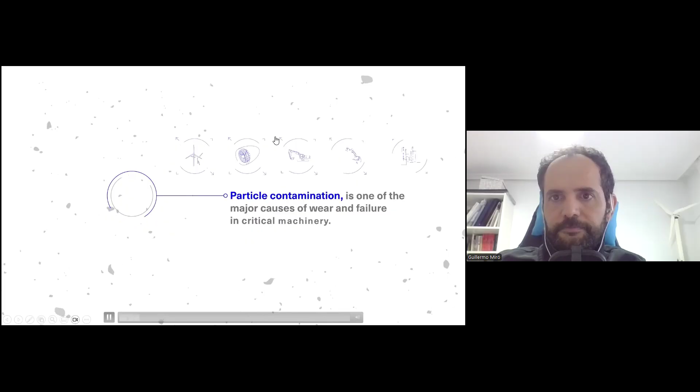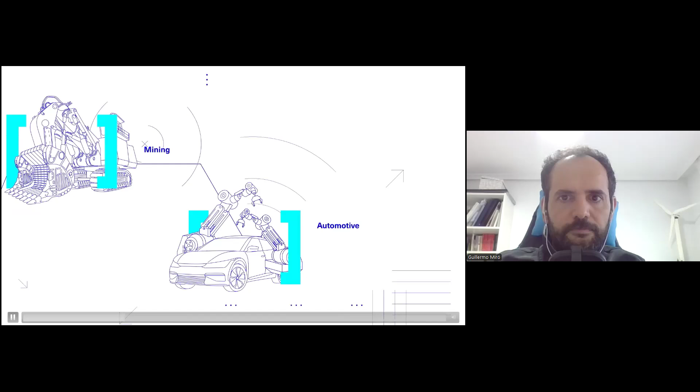Particle contamination in oil lubrication systems is one of the major causes of wear and failures in critical machinery. For over 10 years, Atten has been providing technical support to the industrial sector, enabling them to make precise decisions thanks to their advanced and patented optical technology. By expanding the information on asset health and lubricant quality, problems can be detected or avoided early.

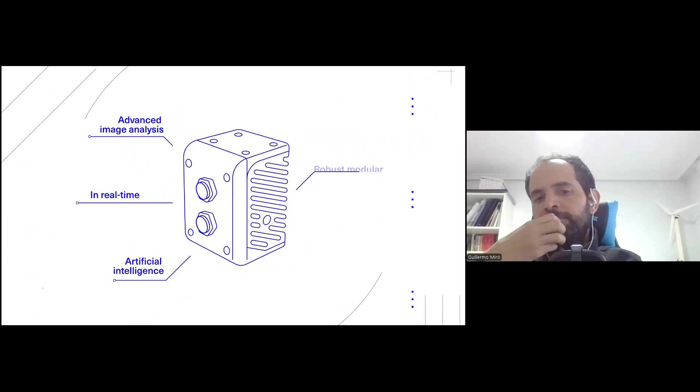As a pioneer in their industry, Atten launched their first sensor on the market over 10 years ago and has since developed 7 solutions with 36 associated patents. Their unique technology applies advanced image analysis and artificial intelligence techniques, allowing them to count particles and provide standardized information, ISO 4406, with exclusive features such as bubble discrimination, particle shape analysis, and fluid degradation.

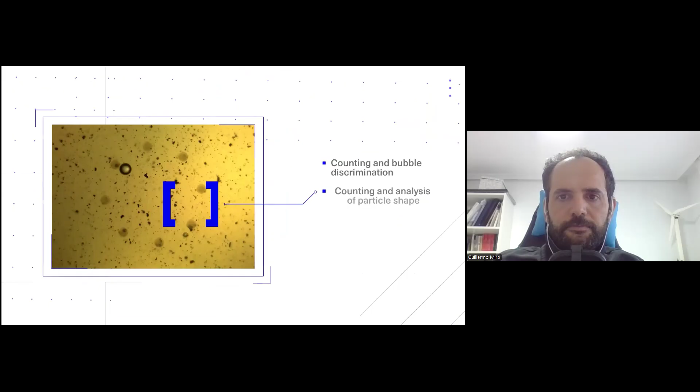With thousands of sensors installed in over 20 countries, Atten has adapted its team of engineers to provide the best possible support according to each customer's needs. If you want to take control of your assets, contact the Atten team.

Okay, so basically what we did is we develop technologies focused on monitoring these 4 main aspects. One is lubricant condition, where we measure oil condition using our own parameter. Then we have a viscometer that can be integrated. Then we have particle counting or contamination monitoring using ISO 4406 standard or NAS 1638 standard.

We are able to, inside of this contamination, measure the morphology and the shape of the particles to detect additional information about the wear processes that are occurring in the machine, adding a new layer of information, a new output of information from the monitoring. And then we are able to measure also water presence, using a near infrared sensor and providing ppm level results.

So, sorry, the first device, it's OilWear. We saw the video before, but let's do it again.

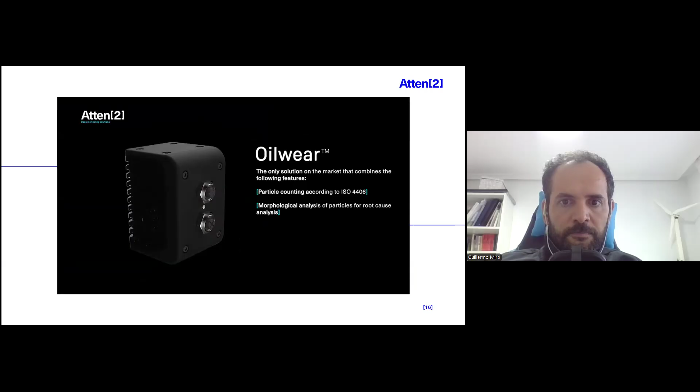This is one of the products that is inside of the SMK, and this is called OilWear. OilWear is a contamination monitor and sensor that detects particles and bubbles larger than 4 microns, and it's designed to work online with no human intervention, and it provides real-time information on the asset condition.

So how it works is it's an inline microscope. It has illumination on one side, optics and camera on the other side, and the oil is flowing in the middle. So based on that, we take relevant pictures of the fluid, and we quantify the particles per sizes, getting cleanliness codes, bubble counts. We are able to distinguish between bubbles and particles, and we are able to distinguish morphologies for particles above a certain limit. And then we provide also oil condition and images.

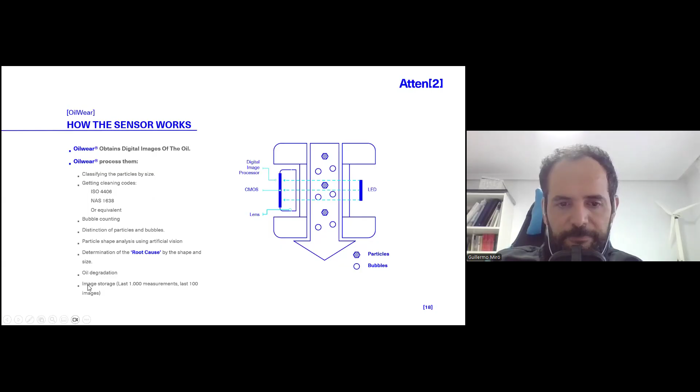Okay, this is a summary of what we do. So basically we provide ISO contamination. This can be also NAS, in case your scenario is NAS based. Then we provide bubble discrimination. So the sensor is automatically discriminating between particles and bubbles, thus providing a result within a wider range of operations, because when there are bubbles, counting particles becomes more difficult, but we are able to overcome that.

Then we provide root cause analysis as said, and then we provide oil condition parameter based on the visual aspect of the lubricant. And then we also provide images. This is the fifth part. So we provide all of this information.

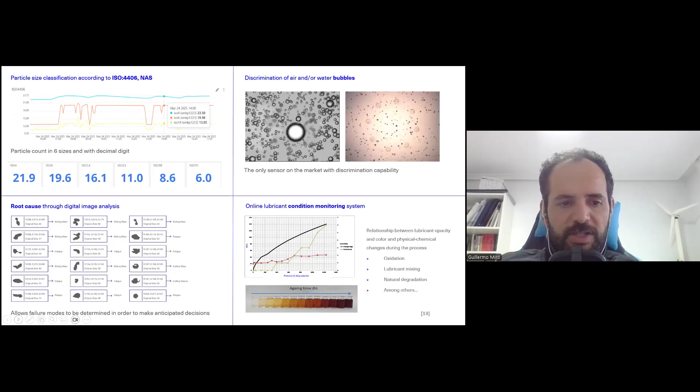Then the other device that is included in this SMK that we are presenting today is the OilHealth.

Do you change the oil in your equipment too frequently? Or are you delaying the change and putting the performance of the equipment and safety at risk? Atten2's Oil Health Solutions help you make optimal decisions, preventing wasted resources and costly breakdowns. Our optical spectrometry technology analyzes the lubricant using visible light, revealing crucial information about its lifespan.

It employs infrared spectrometry to accurately measure water content, providing data in ppm with a high correlation to Karl Fischer tests. It also measures the fluid's temperature. To make better decisions, more information is key. Changes in a lubricant's lifespan can be the result of various factors, such as natural degradation, external contamination, or human error.

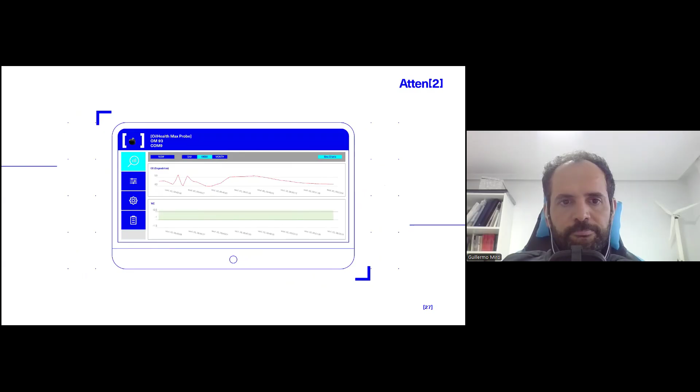That's why our online, real-time technology provides you with precise information, allowing you to make informed decisions in any situation. Monitoring trends over time allows you to identify significant changes in lubricant performance and take preventive measures before major issues arise. With our new software, you can set your own limits, extending the life of the lubricant and better protect your equipment. Keep your assets in top condition with Atten2's Oil Health Solutions.

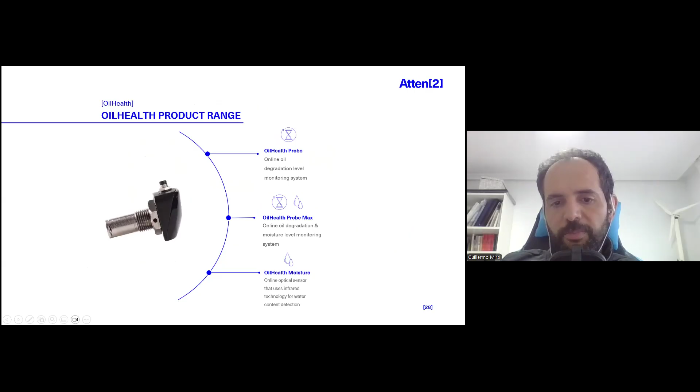So this is the second product we were commenting. This is a visual near-infrared spectrometer. So all principles are optical, and we are willing to monitor both oil condition and water presence at a molecular level. Oil degradation is a process that happens in lubricants due to the contact with air and temperature, and it finally ends in the oil change because of additive depletion, viscosity increase, risk of varnish and sludge.

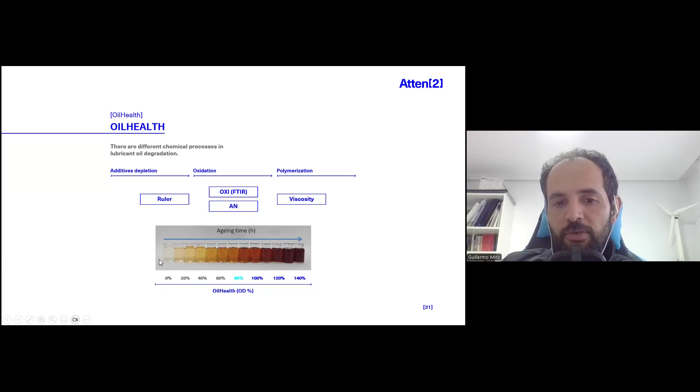So what we provide is a tool that supports you in this oil condition change journey. By measuring the visual aspect and the near-infrared aspect of the lubricant, we are able to trend the oil condition over time. And we have successfully correlated that with some lab parameters. So we use RULER, oxidation, acid number, and viscosity to decide an index. We provide a 0% fresh oil index and 100% used oil index, and based on that, decisions can be made on oil change and oil condition changes.

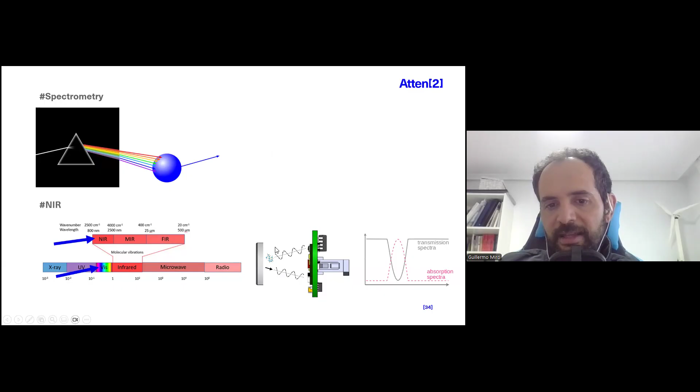Regarding the oil moisture, with this near-infrared spectrometer we measure the molecules of water. Based on the near-infrared spectra, we excite the molecules of water with a specific wavelength, and the more water presence, the less signal we receive. So we are able to correlate that with water presence. It's like a blue ball: if we illuminate it with all colors, it only returns blue, all the other colors are absorbed. In this case it's the same. We emit a light that is only absorbed by the molecules of water, and then we receive less light. This is an absorbance spectrometer.

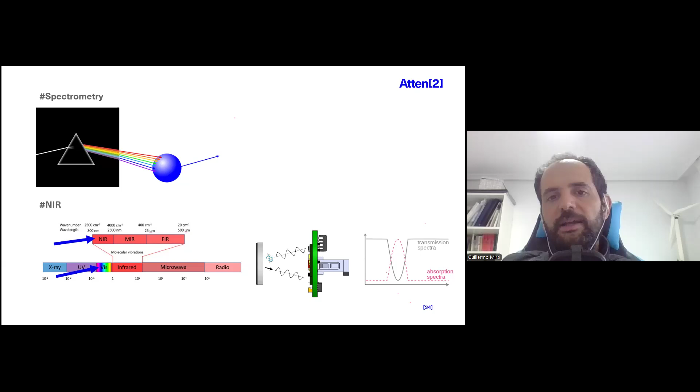So the less signal we receive, the more water we have, and this is able to measure ppms of water. The main advantage of this technology is that we can measure any type of water. As people who are aware of it know, water presence in lubricant can be in 3 states: dissolved, emulsified, and free water. So we are able to monitor every type of water, even above saturation level. We can measure higher than 2, 5, 10% water levels with confidence with this device.

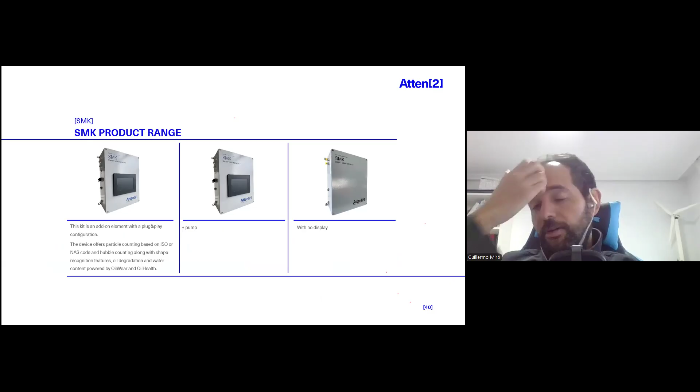Now, jumping to the product that we are going to talk about today. This is called a Smart Monitoring Kit, and it is an integration of sensors plus other types of outputs. As the motto of the training was multiple outputs, this device is designed for that. We have a device that is able to measure the oil properly in a simple way. By just connecting two hoses, we are able to measure the oil with confidence.

It can have a pump or not, and then we have multiple outputs. We have the HMI, a USB stick that can store the data, and then Modbus TCP and digital outputs to extract the data and information from the unit. And we have remote communications too. So we have all these multiple outputs that we can use.

So basically there are 4 types of this device: SMK with a valve, SMK with a pump, and with or without display. So you can choose. If display is not needed, you can choose without a display. If display is needed, you can choose with or without a pump. So these are all options.

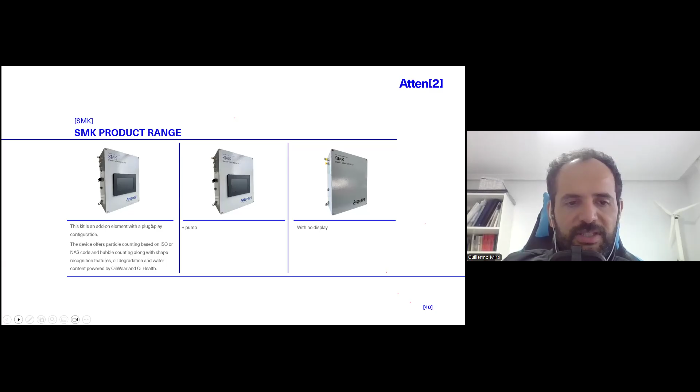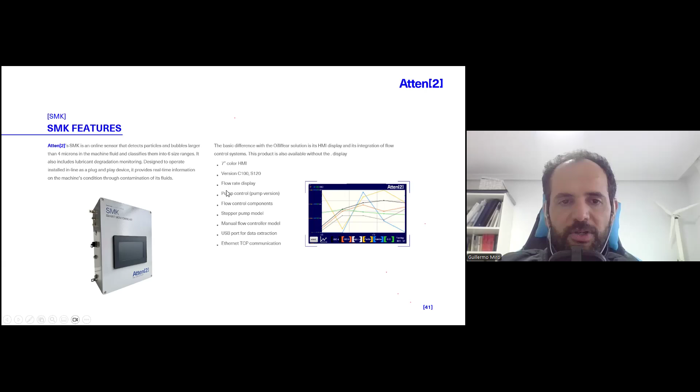And basically this device integrates both OilWear and OilHealth Max Probe solutions. It also provides an HMI with trends and flow rate display. It has a flow meter inside, pump control, a USB port and TCP/IP communication as commented. So which are the benefits? The first benefit is that we have a plug and play solution, so it's easier to integrate than the sensors alone.

Okay, with this enclosure, everything is inside of it. Then you have the 2 technologies in one unit, so it will be a simpler approach, a more complete approach than purchasing one sensor alone. With these 2 devices, we have full quality, I would say full house devices. Okay, so basically the best devices with all the parameters.

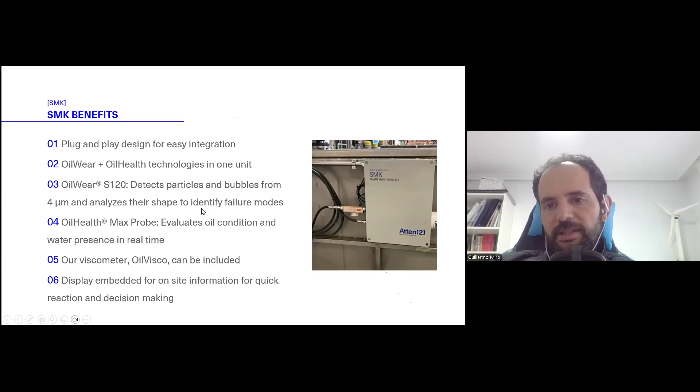And then we can add also a third parameter, that is the viscometer. Okay, we can add the viscometer from the outside, so you could have viscosity, oil condition, water presence, and contamination monitoring only in one device. And then you can have embedded display on the field. You can have remote communication. So it's very, very advanced. In terms of communication, it's a very versatile product.

And now some examples, okay, of cases. First of all, I have to say this is a new product, so we do not have a specific business case with this specific product, but we are going to share how sensors have provided information, and you can see they are being currently used on the field in some examples. Okay, this is a hydraulic unit, and this is a paper machine.

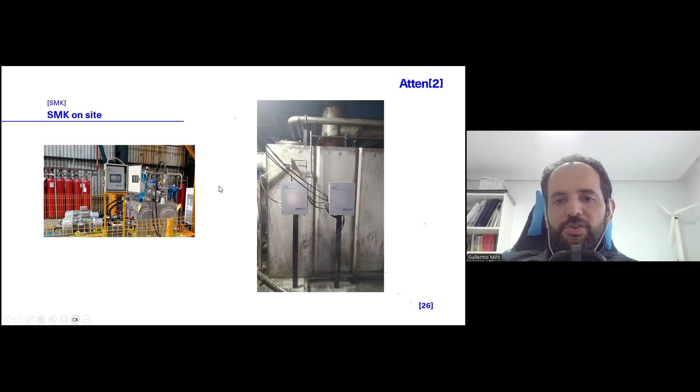Okay, so this is how we approach the market with this device. But as I said, it's a new product. It has less than a year, so there is limited information on the business cases on that. Okay, what I'm going to explain is cases that are linked to the sensors inside of it. Okay, so in this case, first of all, this is one for the mining industry. In this case, we were monitoring the primary crusher.

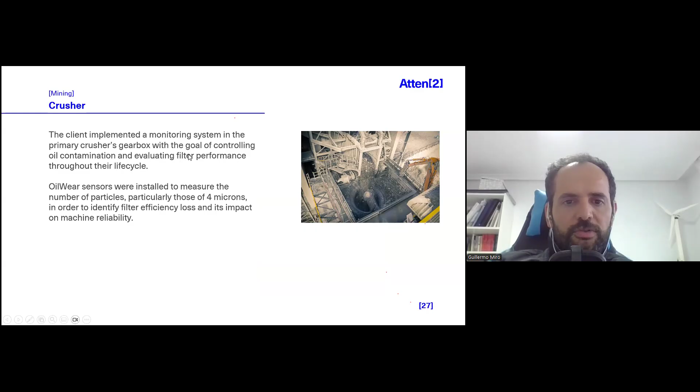The primary crusher in this mine is critical because it processes all the material that then goes through the plant. So they were having issues with contamination and filter performance. Okay, so we were able to detect a sudden increase in a matter of days of contamination and particles, and not only that, but tailoring it to an approach of wear mode, where we were having basically a sudden increase in sliding wear.

Based on that, we were able to detect a failure in one of the bearings of the gearbox that was moving the crusher, and since their machine was so critical, they were not able to wait for a sample. They were using our sensors to implement corrective actions that mitigate the issue and allowed production to continue without stopping until they were reaching the shutdown.

Okay, so it was 23rd of May and they were stopping at 3rd of June. So they needed more or less an additional 15 days of continued operation. So they did whatever they could. They did lubricant bleed and feeds. They increased the pump speed of the system to filter the oil. They were changing filters every day. And they were also, when available, reducing the output of the machine to reduce the mechanical stress on the system.

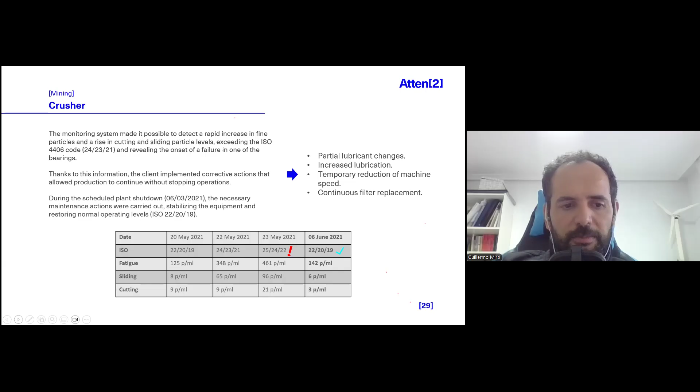Then another nice application is tire manufacturers. Tire manufacturing is a very complex process. So we have been monitoring compressors, gearboxes in different places. We have monitored hydraulic systems. In this case, this is a study from a major manufacturer where they were deciding which approach they were using to monitor the calender gearbox.

Okay, so they experienced a failure in the lower gearbox due to a bearing failure, and this is a mess because this is a very dependent line. So if the calender fails, all the rest stops. So they were doing their criticality analysis, and one of the key points was that the detectability of the gearbox failure, in a range out of 5, was 4. So they decided to install sensors, and they reduced the gearbox failure.

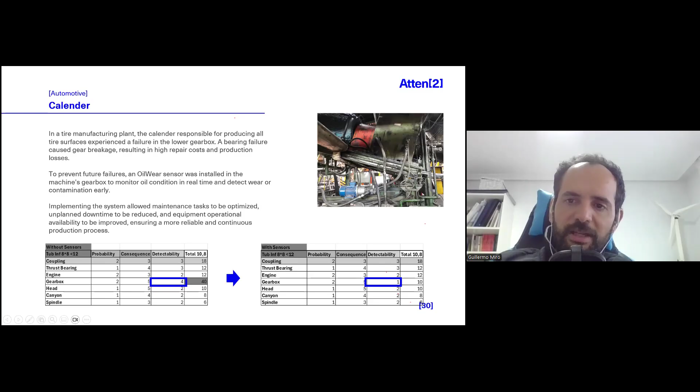And in fact, recently we detected in a gearbox a contamination with the powder of the tire. There is a powder that they use to separate the rubber sheets, and we detected an abnormal contamination with the sensors, and they were able to replace the oil in time to reduce the influence of this powder on the system. Because they are using sensors, they reduce the criticality.

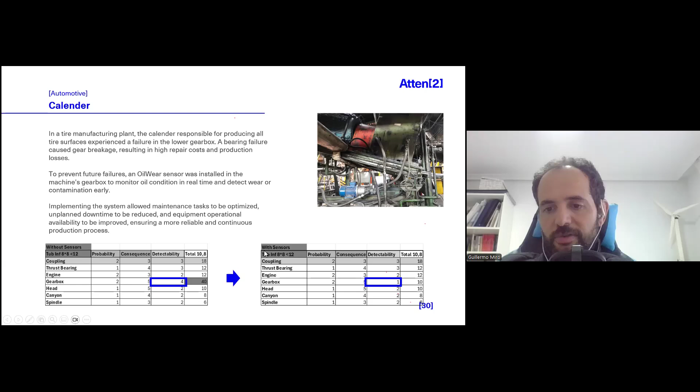Okay. And then in the same plant, we monitored the 6 screw compressors because they consider them critical. And basically, the business case there was the replacement of the lubricant, the oil change intervals increase.

In this case, they were having a 6-month fixed oil change. And the oil was costing around 20 euros a liter, so that would be 5 or 6 times a common price for lubricants, for your reference. So based on this scenario, they decided to implement sensors to try to extend oil life, but monitoring continuously.

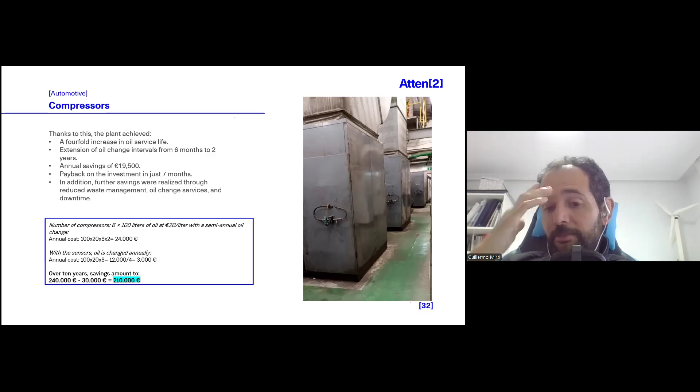So basically what they did is they were able to increase the oil change interval from 6 months to 2 years, and with all the lubricant changes in the compressors, that was around 20,000 euros in savings, around $20,000 in savings, and the sensors were paid back in less than a year. And for sure, sensors were also providing asset health, but in this case, only the oil change was 24,000 euros. And since they change the oil once every 2 years, it's 3,000 euros.

So over 10 years they reduced costs. So they earned around 200,000 euros, just by basically implementing a condition-based oil change with sensors.

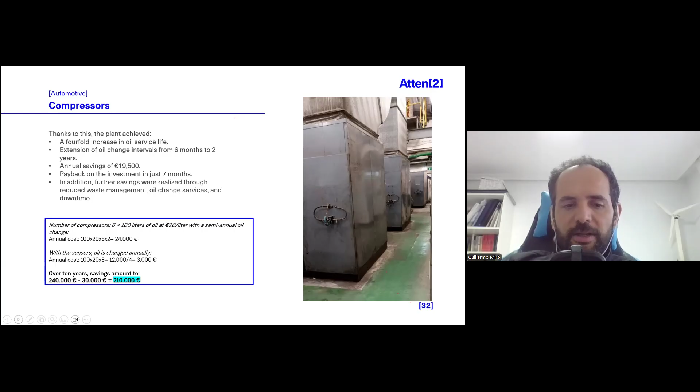Then we have other examples for paper plants, where we were monitoring pulpers and Yankee dryer gearboxes. So this is, I would say, a simplified version of the SMK3 that we showed before, where we have OilWear and moisture inside of a box. And in this case, they have a gearbox with a pump to filter the oil. So we just use this main filter. We will talk about that later.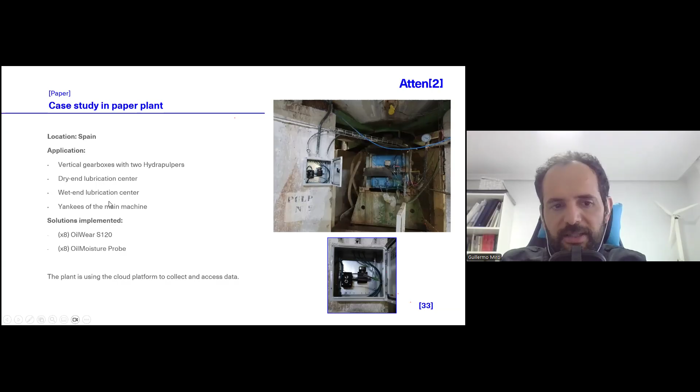So we were able to monitor, in this case, pulpers. We were monitoring lubrication, so wet and dry lubrication systems, and then the Yankees of the main machines. We implemented eight sensors in each, and then we used our cloud to gather the data. And we were able to see multiple events.

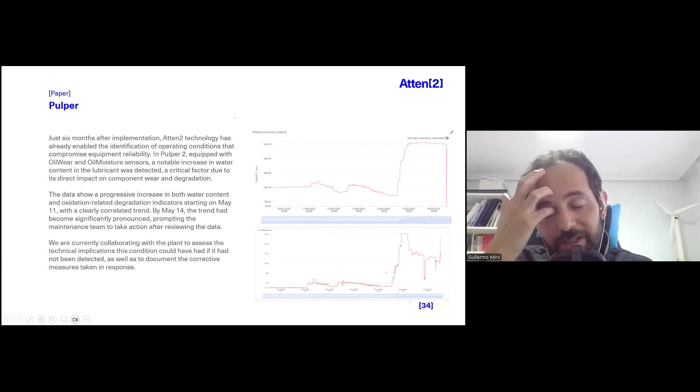I do not want to get into detail a lot, but we were able to detect a lot of water events. Basically every time they clean the machines, water is used continuously in the paper plants. So every time they used water, a water contamination was shown. So every time, the customer received this notification and was informed.

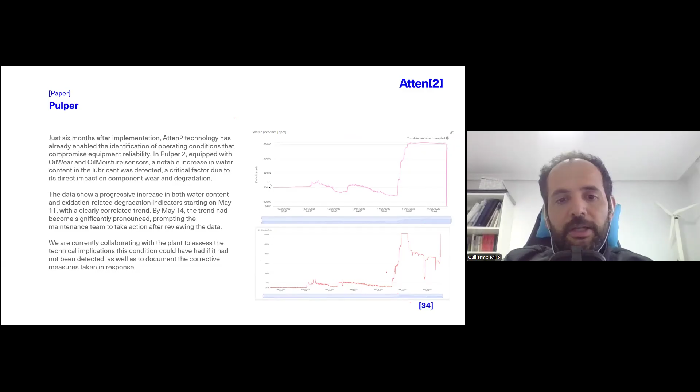But especially in pulpers, the main issue is that the water can fall down from the tank, and it rains on the gearbox, and if the seals are not in proper condition, the water goes into the pulper system. So we detected this too, we saw the pulper water contamination, and we saw even the dynamics of the contamination. So every time they started and stopped the pulper, additional water was coming in, so it was curious.

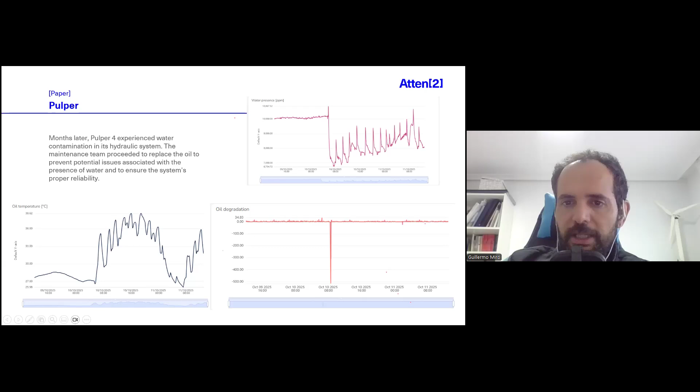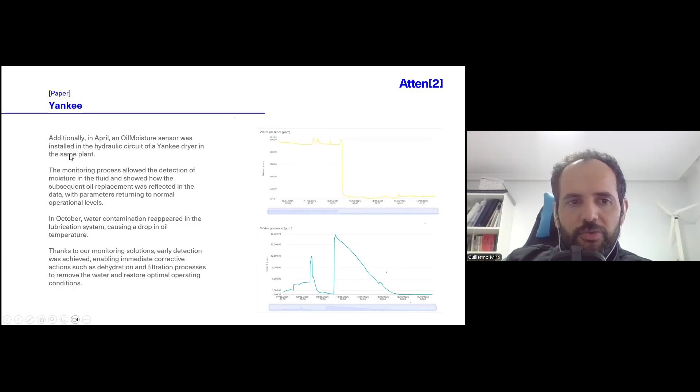In the pulp and paper sector, every type of asset in the system that is lubricated. So we start from the pulper gearboxes, then we can measure the shoe press hydraulic contamination, the refining process, the Yankee dryers, and then if you have auxiliary hydraulic pumps or compressors, they are also part of that.

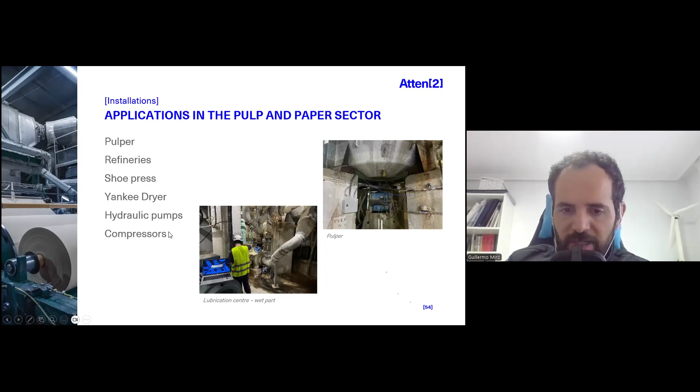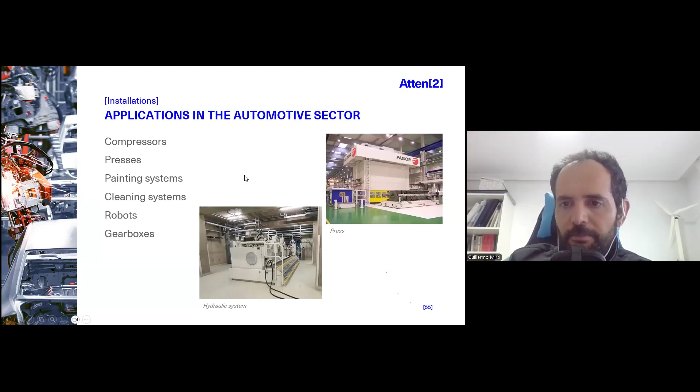Then in automotive, where we have a lot of experience too: compressors, presses, painting systems, cleaning systems in case you clean parts, robots, gearboxes, main process gearboxes. We have end-of-line gearboxes for some automotive manufacturers. And also, we can monitor your process, if it's tires or an automotive part, with calenders, Banburys, etc.

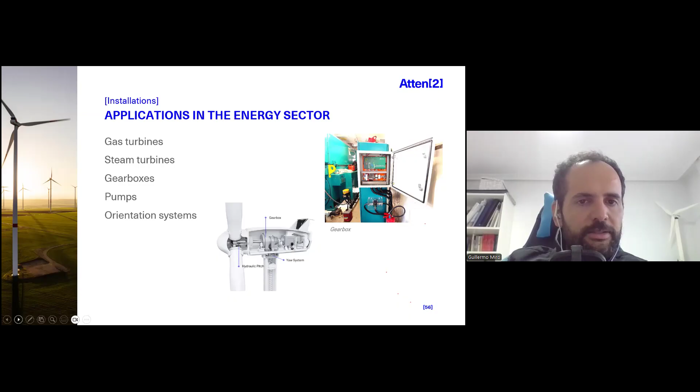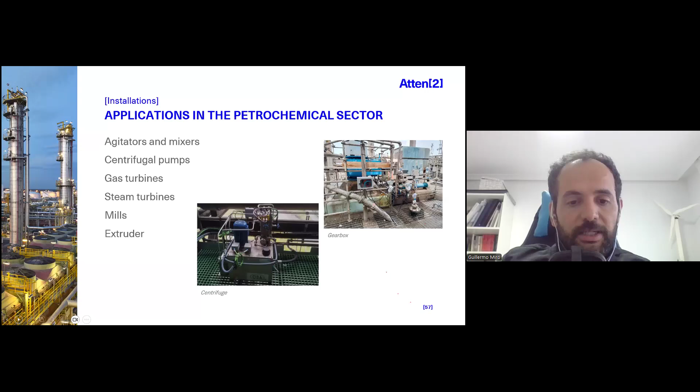And then in, let's say, the petrochemical sector or other process sectors: pumps, agitators and mixers, centrifuges, gas turbines, steam turbines, mills, extruders. Any place that has a critical lubricated system, we can monitor. So it's up to every process, but we have experience in a lot of industries, so we can support with our engineering on top of that.

Okay, so then the last part, regarding how to integrate and extract all the outputs. We have this kind of pathway to support that. So basically, we need to do a technical validation of the application.

For example, as we said, diesel engines, because of soot, gas engines, they require a specific product. So not every installation will be straightforward, so our partners at Tiara know which applications are easier and which ones are not possible.

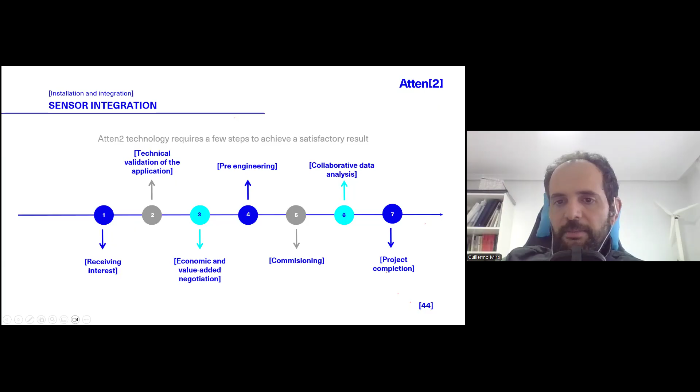Then, together with the customer, Tiara and us, we do pre-engineering, like deciding the mechanical installation, deciding the hydraulics, deciding the communications, and then we commission the system and provide some support in terms of data, how to integrate it, how to analyze the data, and so on.

So when deciding how to install a sensor or an SMK or whatever device, it's interesting to focus on these 4 axes. One is physical integration, where we are going to get the sensor, place it on the machine, fix it so it doesn't fall down, vibrations, etc.

Then we have the hydraulic part. So where do we get the oil out from the machine? Where do we return the oil? Is the oil representative of the machine?

Then we have where to get power supplies and comms integration. How do we connect the system to the power and to the rest of the plant communications?

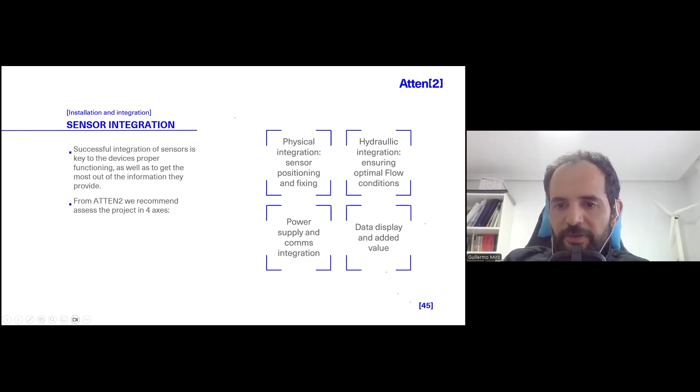And then the last but maybe most overlooked part is how we are going to take advantage of the data, how we extract value from the data. This part should also be involved in the conversation.

So where do we recommend to install sensors? It's like when we take a sample from our body, from the blood. This is the example of blood test and lubricant oil condition monitoring.

It's a similar approach. So we need to decide where to take the information to be useful. For example, if we take a sample from our blood after the kidney, we won't see relevant information because most of the toxins and products that are harmful to us are kept in the kidney.

And then they are just extracted via urine. So in this case, depending on what we want, normally what we would like to have is information from the asset wear processes, or for the asset contamination sources. So it will typically be after critical elements, bearing, gears, hydraulic systems, before the tank.

Or if we are not able to do that, in auxiliary conditioning circuits such as a filtration system, a cooling system, but always before the filters, because if not, we will be monitoring filter efficiency. Then if you have a sampling point for laboratory analysis, for sure this is a good point to start.

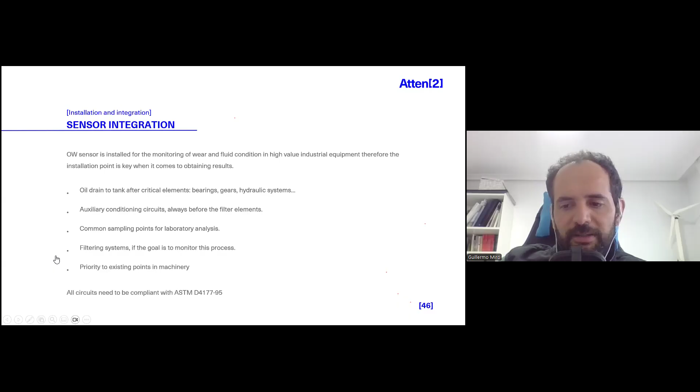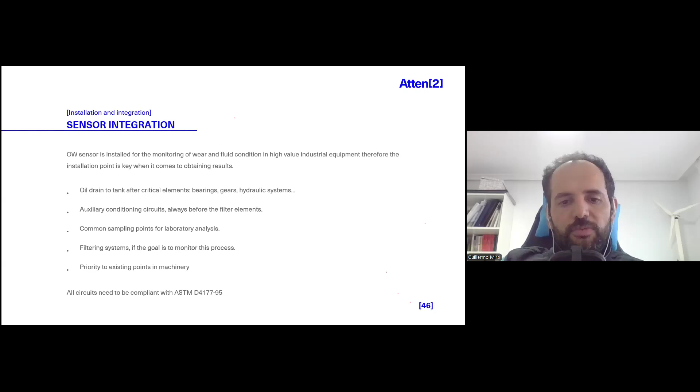And then we always recommend using existing points in the system. If you see a tap, a cap of a hole, or even a temperature sensor that can be moved, or a pressure sensor where we can implement a fitting that maintains the pressure sensor but also adds a hose port, this could be available. And then you can always check relevant standards to provide condition monitoring ports to your system.

What type of installation information do we need? So we need 24 volts VDC power supply. We need maximum 1 amp for the pump system. You can find this on the datasheet, and then we provide typically cables to the applications.

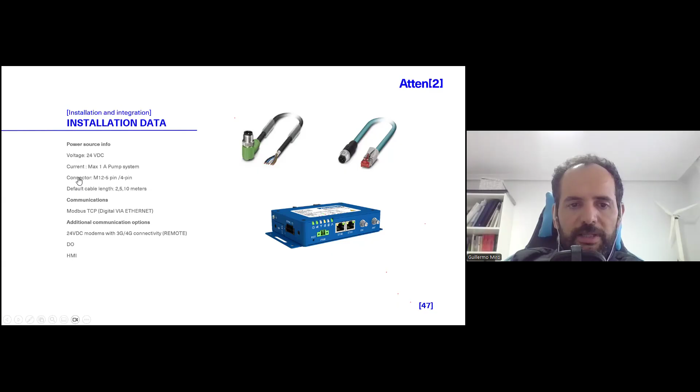So you can purchase from Tiara the appropriate cables. It's M12, so it's a standard instrumentation cable, but you can order from us. And then the main communication type is Modbus TCP, but you also have additional communications options: remote communication, sending data to another place via cellular connectivity, digital output that can be used, HMI, and also USB stick. All these additional communications options are available for the SMK3.

In terms of hydraulics, we need a low flow bypass, recommended 200 milliliters a minute. And then depending on the pressure of the system, we need to divide it between non-pressurized and pressurized systems. In a non-pressurized system, we use the pump version, and the pressure allowed is between 0 and 2.5 bar.

And then if we are in a pressurized system, we have the valve version, the non-pump version, that can have between 2 and 16 bars, and the sensor port or device port dimension is 1/8 of a gas inch.

We do not have viscosity limitations normally, but if you are using a pump system, the hotter the oil and the lower the viscosity, it's better. But the system can provide a result even for high viscosity lubricants.

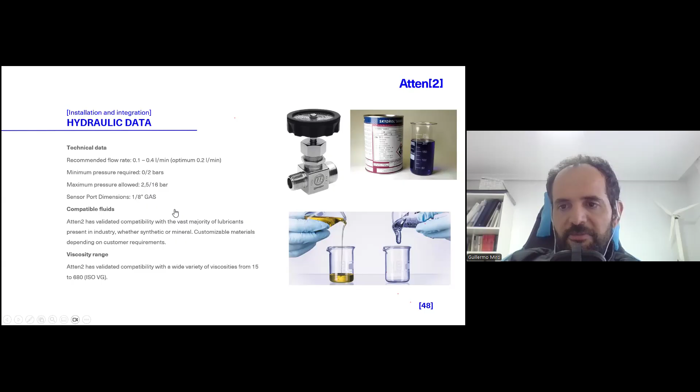Which types of components can be used? So hoses, ball valves, pre-filters, check valves to avoid the oil coming back, sampling points if needed, pressure indicators, and if you want, you can add a flow control or flow viewer device on the output.

Pre-filters are important because they limit the risk of having a very big particle clogging the flow meter and affecting the pump. So some pre-filter is needed always.

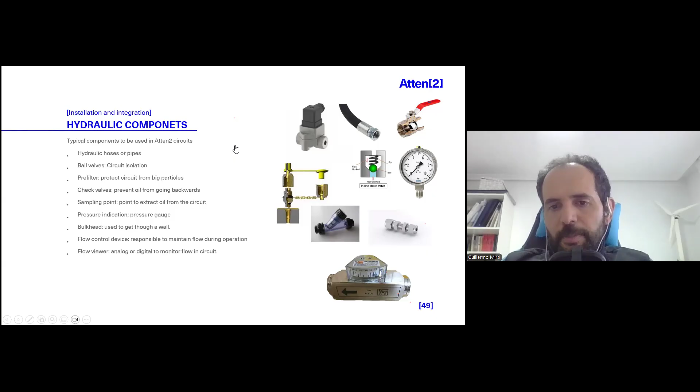Normal recommendations: pipe section needs to be studied for different viscosity, especially for very high viscosities. Then we need to ensure high bubble content isn't limiting; if there is bubble content, we can add additional accessories called a bubble elimination system to reduce the influence of bubbles. As I said before, we can distinguish between particles and bubbles, but up to a certain extent.

For some applications like bearings or dynamic gearboxes, we always recommend using a bubble elimination system that limits the presence of bubbles, allowing us to perform a better measurement. And then always check for leakages when installing or checking the result, so there is no leakage on the system.

In terms of connectivity, sensors and SMK3 are available to do a wide variety of communications. We can connect wireless to a cloud, connect into the network and use it as another computer in the network, or we can do a traditional integration into CMS, PLC, or SCADA systems via a PLC and Modbus integration. With our devices, the on-premise software is provided.

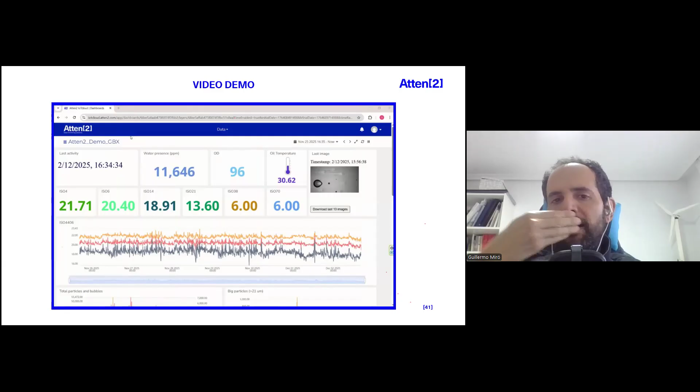We typically generate a dashboard for every device. So if you have 10 assets, you have 10 dashboards. And every dashboard has more or less the same structure.

We have the main parameter data. So if we have one or two types of sensors, we have the main relevant information for each sensor. We can tailor the information with the filter, with the time filter.

So we can choose quick ranges or choose our own. We can refresh or we can provide real time, so it will show the last result. We can just play with historic data. And then we have the last time the sensor sent data to us.

Then we have main parameters like water, oil condition, oil temperature, ISO 4406 cleanliness code. We can add any axis if needed. And then we have also the last image. Images are sent on an hourly basis, but we can see the image of the sensor on the cloud solution.

Then we have the time series. You can also download the images for your information, with the button you download the images to your computer.

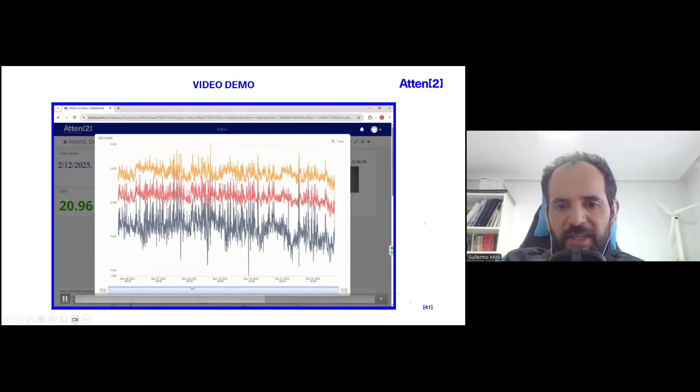With the time series we can see longer trends, so we have ISO 4406, total particles and bubbles, and then as I said, we can enlarge the images. We can see the full image, do zoom on the graph, and see very detailed results.

And then also we can extract every widget information, export data either as a CSV file, or we can download the image as a PNG to add to our report, to send via email, etc.

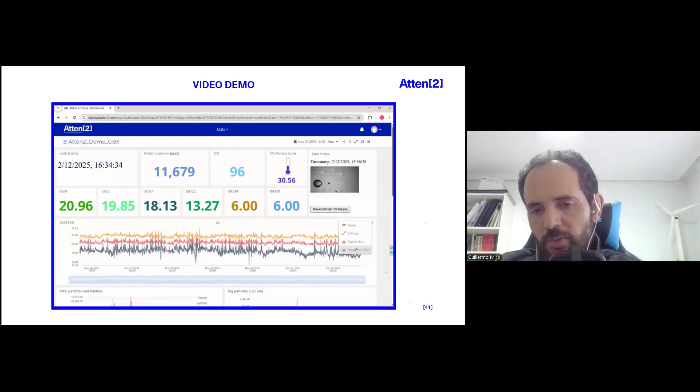Then we have additional widgets: total particles and bubbles, big particles, shape recognition features, oil condition, and in this case we have water presence and temperature.

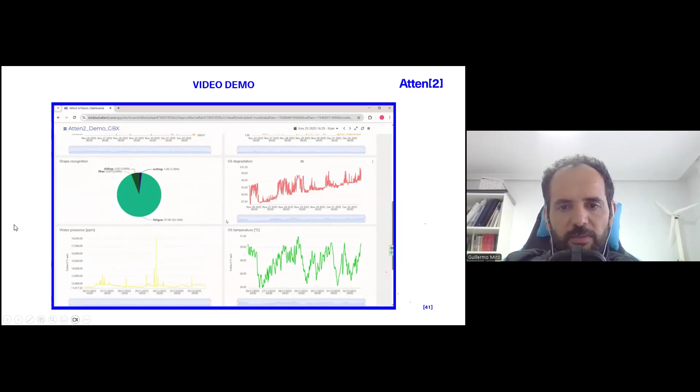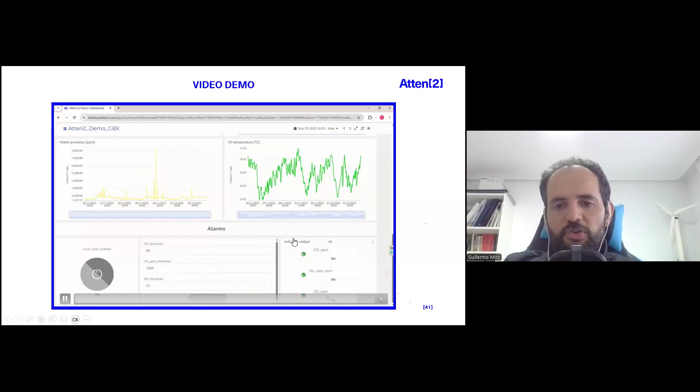In this case, since we were monitoring with a similar setup, this will be an SMK3-like webinar. We are adding a new feature where you can set up your own alarms, and an email will be sent to you. For example, if you set an OD threshold, like when the system is above 80 on the OD, you'll receive an email, and you can turn these alarms on or off. This allows you to check how the alarms are performing in real time.

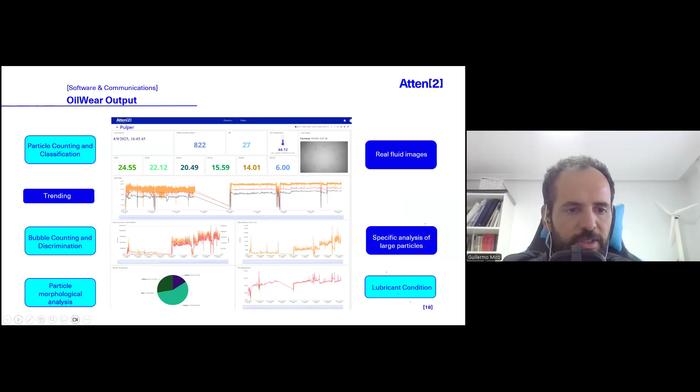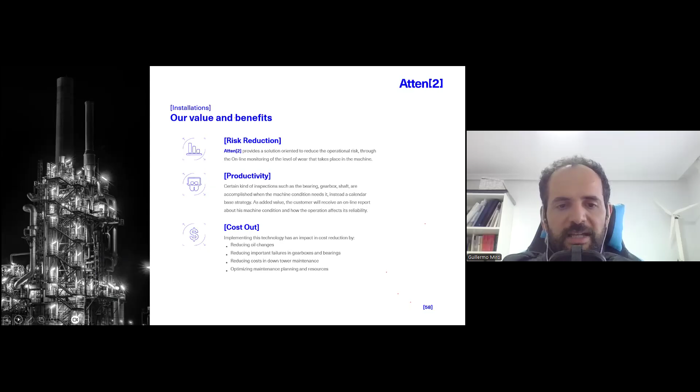Okay, so this is the dashboard approach, and these are additional examples. So just to finish, we are focused on providing risk reduction in operating assets, basically online monitoring the condition of the lubricant and the wear process occurring in the machine, and then increasing productivity, reducing the cost of operating, and increasing maintenance ability to take actions on the system. So that's all from my side.